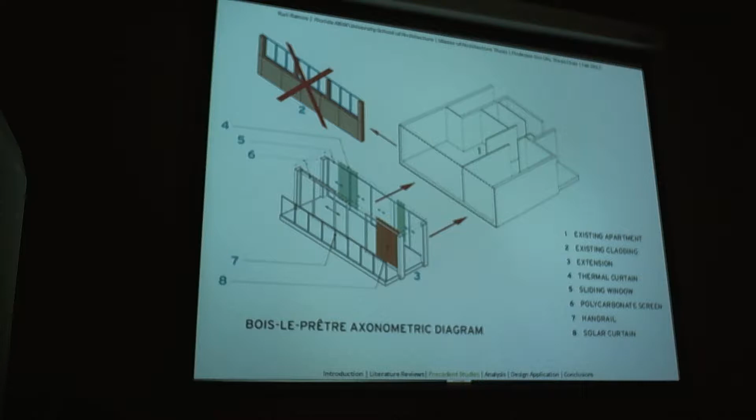What they did is remove the previous facades, and in phases implemented this new facade, which adds a kind of winter garden and a balcony to every apartment, expanding their living space. They also added square footage all around the building. This works both as a double skin for natural ventilation and for shielding from the cold, et cetera.

It's in England, in northern England, and it's recently been—it's also a product of 1950s mid-century housing projects. It's recently been purchased by developers and is being redeveloped as two-thirds, what do you call it, like yuppie housing, I would say, and one-third low-income housing. So it's kind of an interesting mix.

This is a pretty basic Corbusian understanding of housing—circulation is every third floor, and there are these open-aired streets, as they call them, that people circulate through the building. So it works in a way, and it's interesting, but it didn't work at this specific location.

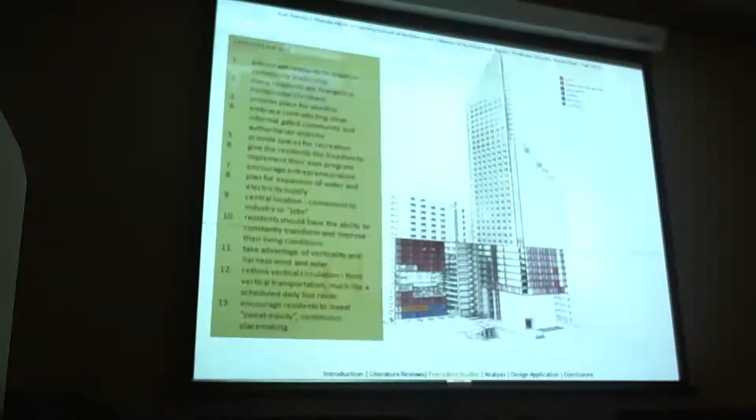In the 1990s, when Venezuela went through their financial crisis, this construction was abandoned. Then in the 2000s—I don't know if everyone's familiar with the history of politics in Venezuela, but Hugo Chavez is someone who says he's okay with appropriation of land. He thinks that public or private land is land of the people, and people should be able to take advantage of it. So this is a case of that—it was an abandoned tower for a decade.

Then one day these people started coming in and taking up the floors and creating community.

Today it's one of the most successful kind of squats, high-rise squats in the world, and to me it's really interesting. People have created this cooperative on their own. So it goes back to contradiction, where it's a squat, but it's also a gated community. It's a co-op, and you can see the little blue right at the bottom there, that's the entrance. It's really secure, and the co-op approves whether or not your family can move in. Then on every floor there are shops and sports facilities.

There's religious space, a church. What's also interesting about this project is that most of the people are of the same religion, so they all belong to the same church that meets right here on the blue, if you can see at the bottom there.

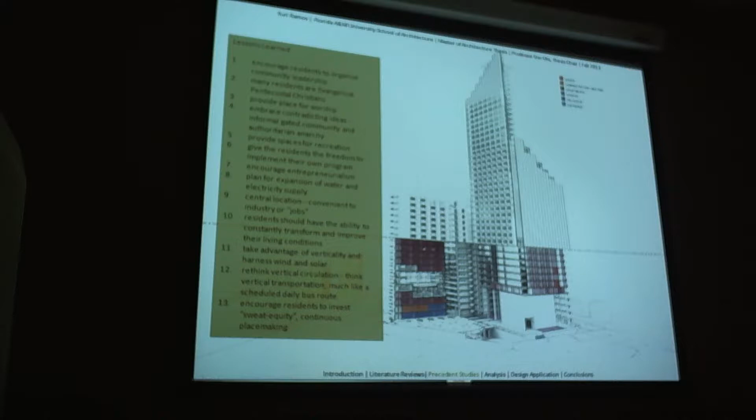Some of the things I learned from this precedent in particular: it's to encourage entrepreneurialism, allowing people to really invest in where they live. That's what creates community, and it encourages people to get organized, to invest sweat equity into their place, to make it better, and that reaps the benefit.

This is what the Urban Think Tank is thinking about - how they can help this community implement improvements and develop by implementing more vertical circulation. Right now they only take the stairs; there's no elevators, only one stair to that main building you see. So they're introducing another vertical element here, and here, and here, for circulation, and introducing solar power and wind power to improve the living conditions.

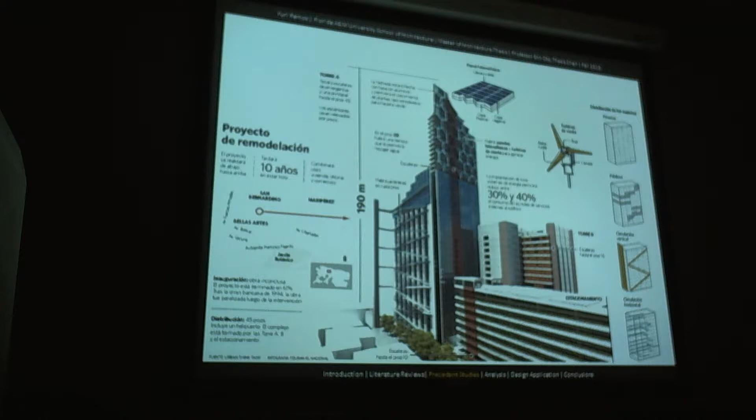And more possibilities for entrepreneurialism, more shops and things like that to improve with this precedent. This is it for my presentation. What I'm trying to do is really learn from these examples and implement what I've learned into an urban housing, low-rise housing building in Wilmington, Delaware. Not quite there yet, but we'll get there in a bit. That's it - any questions?

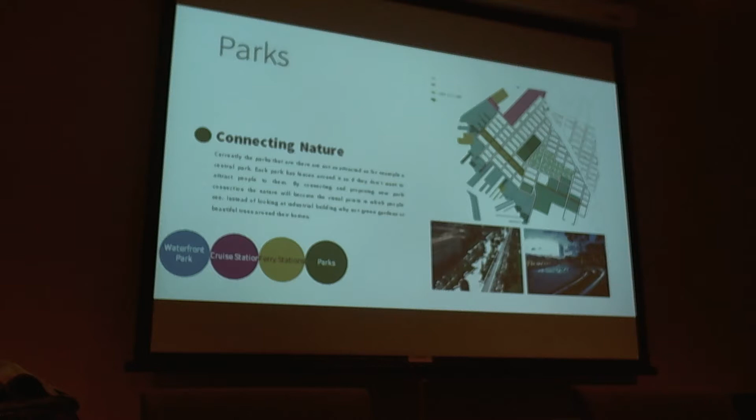The walks are inspired by Las Ramblas in Barcelona — you'll see two pictures of it. I want to create this main access right here, an area where people can come and walk without worrying about cars. It's going to be mixed use, with two buildings on each side. The first floor of each building will be retail and restaurants, mixed use, and the upper levels will be residential, so people could live there right in Red Hook.

This is what I call the spine of my site, because it leads you to my building, which is a gateway center. This starts the experience when you get there — you just walk and go get a bite to eat, and it gives you connections to the whole site: the waterfront park, the ferry station, the cruise station, and the parks.

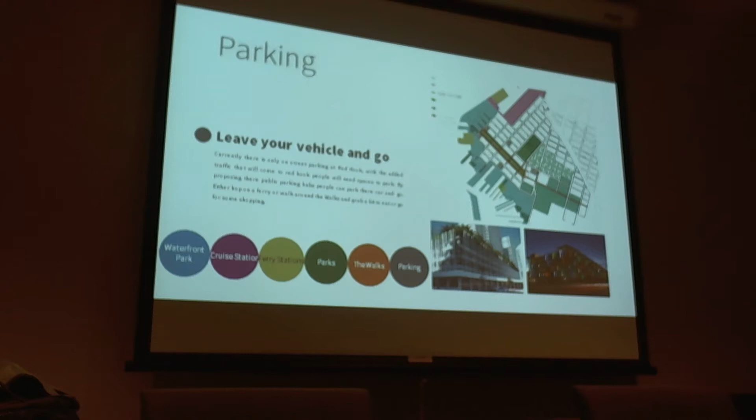Of course, this is going to bring more traffic. Right now the on-street parking isn't going to be enough, so I want to create more parking garages in the area. I don't just want a standard parking garage — I want to give life to it, so at nighttime people can go there and know it's a safe place.

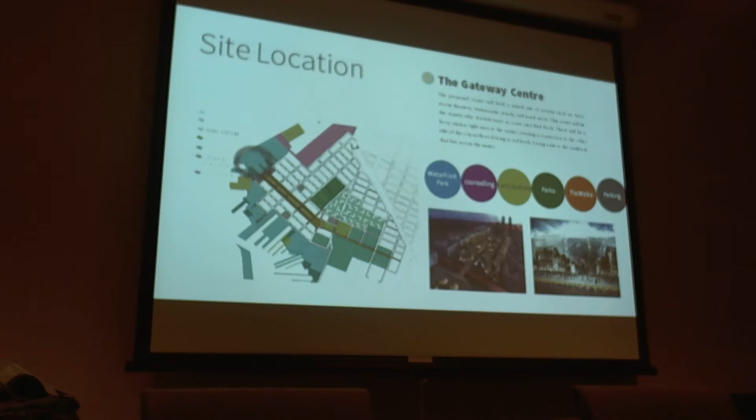Down here are some concepts — this is a proposal for a project done in Japan. You can see these two structures. I do not want to block the walkway here, so as you're walking I don't want a building right in front of it. What I want to create are these two structures that welcome you into the waterfront and also welcome the water coming in. You can sit down, grab a bite to eat, and it creates this social interaction in Red Hook — an identity that's not there right now.

And that concludes my presentation. That's where I'm at right now.

Why? I was born and raised in New York City, and I just always wanted to do something to kind of give back in a way. I always knew Red Hook was an area where when you go to New York, you say Red Hook, you don't go there.

Do you think that if you could possibly re-implement some of this, that would change things? Yeah, New York City has changed a lot. Right across here from all these residential areas, this used to be exactly how it is. This is actually all new residential. I want to kind of connect that, not just to that side of the city, but the rest of the city.

I wanted to connect physically with the ferries, so you can just go to the other side of Manhattan. There's a lot of people in New York, can take the subways everywhere. You don't really drive a car too much because parking is always a pain to find. But here, literally, there's only one bus station and a 20-minute walk to a train. That's unheard of in New York City. Usually there's a train stop every two streets.